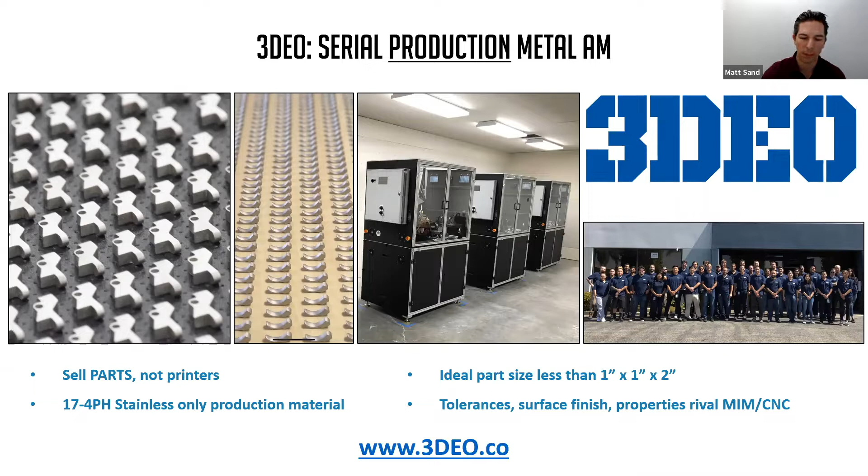I'm the co-founder and president of 3DEO. For over 3 years, I've worked with customers in hands-on applications and moving parts into production using metal 3D printing as the technology. I'm a serial entrepreneur, so I've started a lot of different companies in different industries, and I was also an officer in the US Air Force. I have an MBA from UCLA, so don't hold the MBA against me, but you'll see that my focus is more on economics of additive manufacturing and how that can succeed in the marketplace.

So for today's agenda, I've got 5 key points that I want to talk to you about. The first, for those who are new to 3D printing, we'll quickly cover what is 3D printing. I'll talk about design freedom and what 3D printing or additive manufacturing brings to the table in terms of design freedom. We'll talk about manufacturing flexibility on the factory floor. As you're making parts, what type of flexibility do you gain from using 3D printing as your core fabrication technology?

And then we'll dive into the case study, which is Ergo Kiwi, an ergonomic X-Acto knife for architects and others needing cutting capability. So we'll talk about that specifically in the context of design freedom and manufacturing flexibility. And we'll finish the presentation with how to get started with 3D printing. So with that, let's dive in.

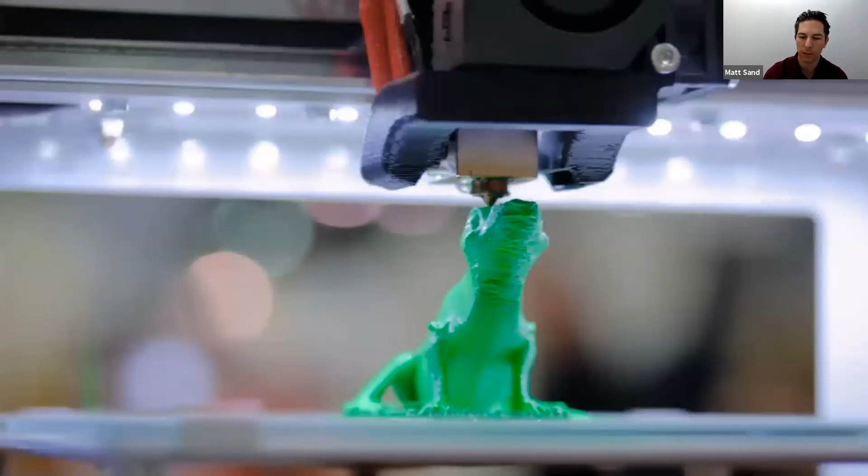First, what is 3D printing? Well, 3D printing is the process of quote unquote growing a part layer by layer. You build the part on top of itself in layers, and eventually, as you can see in the image here, the full part is fabricated. So it's because you're adding material on top of other material that they call it an additive process, as compared to subtractive, which is cutting material away from a block of metal, for example.

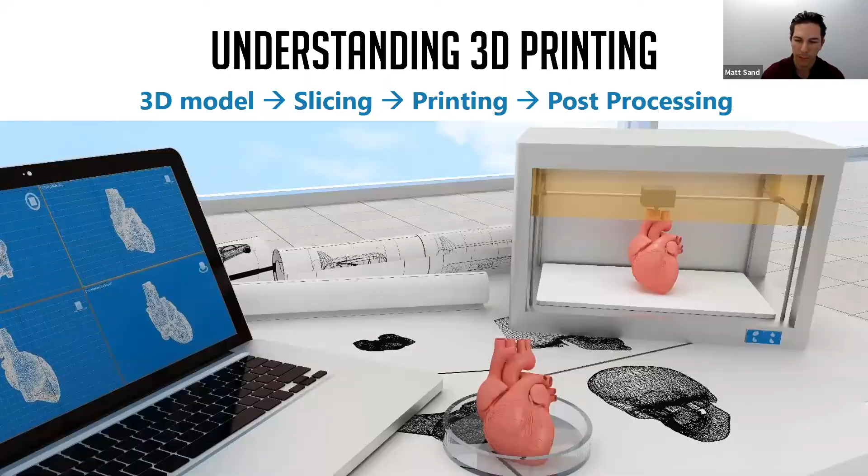So I have this video here that I want to show you of a plastic FDM printer, which a lot of you have probably seen and are familiar with, in action.

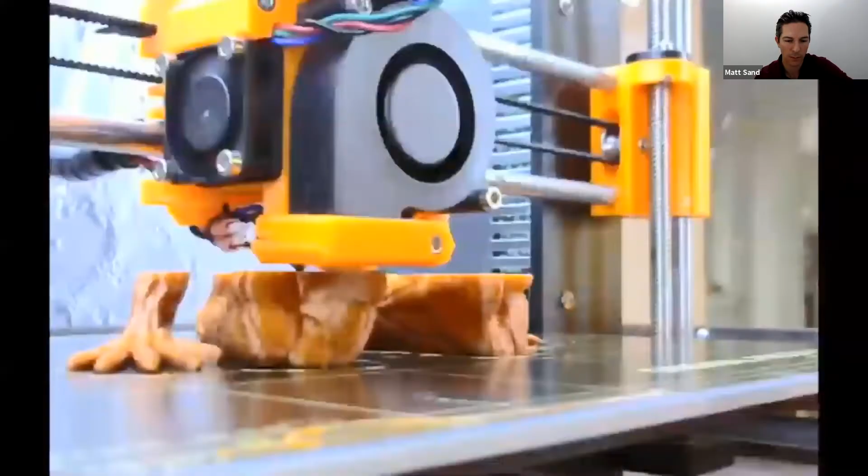As you can tell, the video is dramatically accelerated when you compare it to the actual speed here. But I accelerate it just so that I can show you what it actually looks like. There's material feeding into the printer, and layer by layer, this part is being grown until it's ultimately done, and the character here is fully printed. So that's an example of 3D printing.

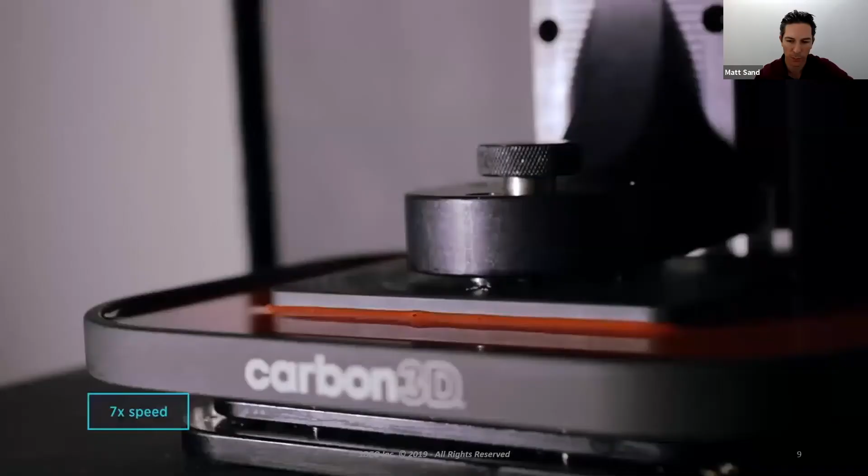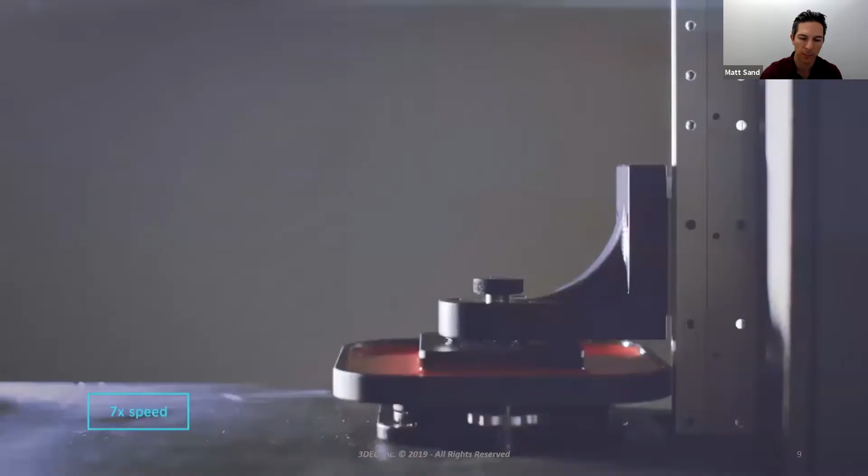Of course, this is plastic 3D printing, not metal. 3DEO does metal 3D printing, but the general principles are the same. Carbon 3D has gotten a lot of attention, specifically because of the speed of its printing. If the other video was sped up by 200x, this video is only 7x faster, and it gives you an example of how fast 3D printing is getting and the type of complexity we can achieve from 3D printing. You're able to gain that complexity because you're growing the part layer by layer.

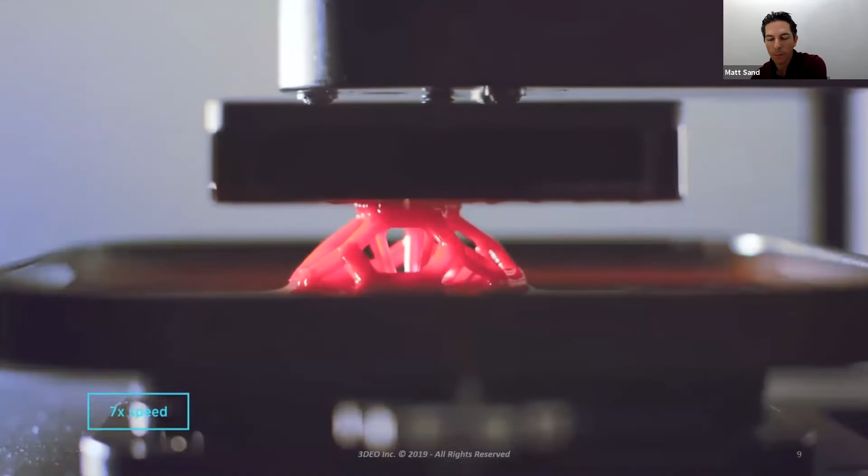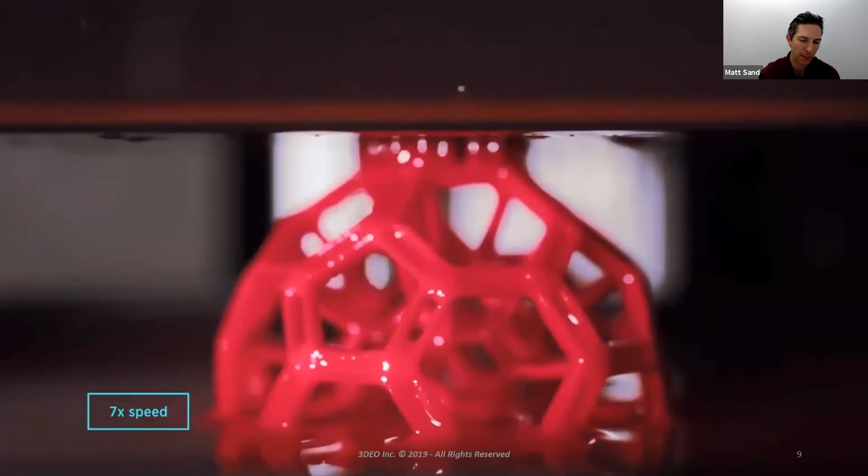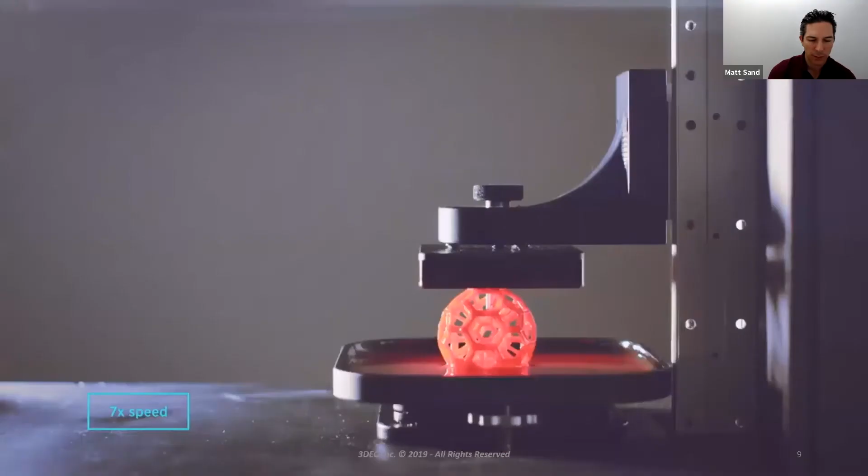This is a pretty famous part because it was printed during a tech talk by the former CEO of Carbon 3D. It was printed during the talk in the background, so it's pretty cool. You can see the complexity of that part as it comes out of the vat. So that's another technology on the plastic side, but let's turn our attention now to metal.

What you're seeing before you is the GE fuel nozzle, which is the poster child for metal additive manufacturing. It's not the entire piece that you see, but just the tip of this component. It was previously 20 parts, it's now 1 part. It's 25% lighter, in addition to being 5 times stronger. And the new design is realized because of additive manufacturing.

Most importantly, when it comes to aircraft design, 15% more fuel efficient, 10% more thrust. So you get all these benefits from working with additive, and as a result, this is one of the biggest success stories in metal 3D printing. Another success story is completely custom titanium hips and knees. These are implants that go into the body. They can be titanium, they can be cobalt chrome, but this is a great application and a huge success story in the world of metal 3D printing.

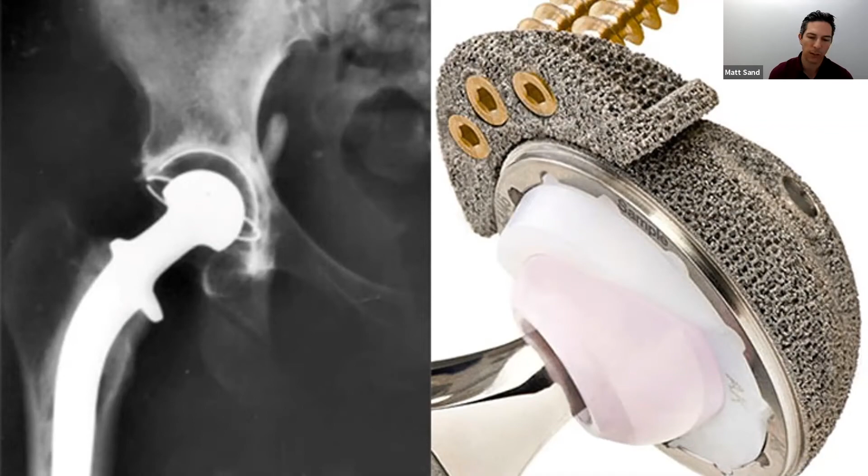When we focus on metal additive manufacturing processes, I just want to throw out there that 3D printing of metals is a very broad category. There are many different processes that fall into this category. Powder bed fusion; DMLS, direct metal laser sintering, is one type of powder bed fusion. Binder jetting is in the media a lot recently; there are some new binder jet processes coming on the market. Extrusion is finally here for metals, so that's the FFF or FDM type of deposition.

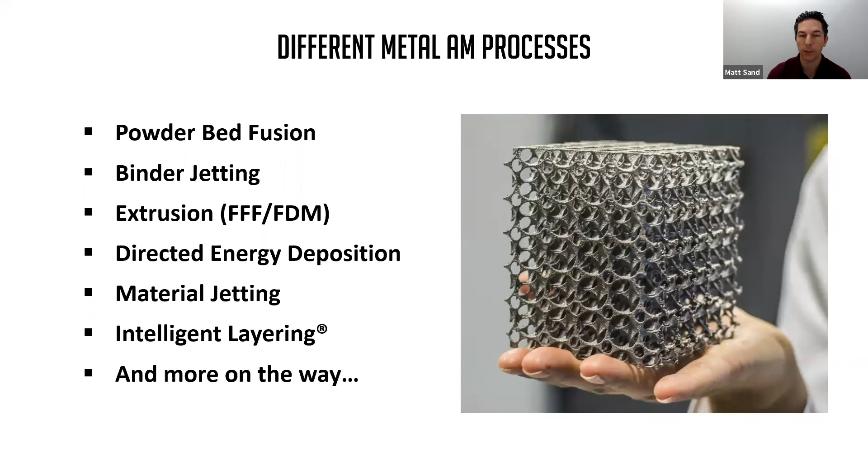DED, material jetting, and then intelligent layering is 3DEO's unique and proprietary technology. And there are also more on the way. So these all fall under the category of metal 3D printing. Understandably, if you're new to it, it can get pretty confusing. But it's worth working through the difficulty to understand what the technology can do.

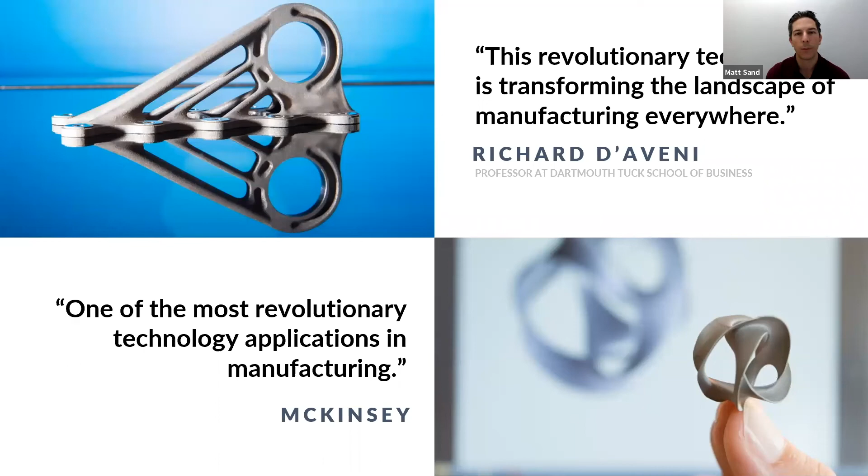And here's why. A professor at Dartmouth said this revolutionary technology is transforming the landscape of manufacturing everywhere. So pretty exciting. McKinsey, the management consulting firm, says that it's one of the most revolutionary technology applications in manufacturing. So without a doubt, 3D printing has already changed the world of prototyping. It's now starting to change the world of production dramatically, and now's the time to dive in.

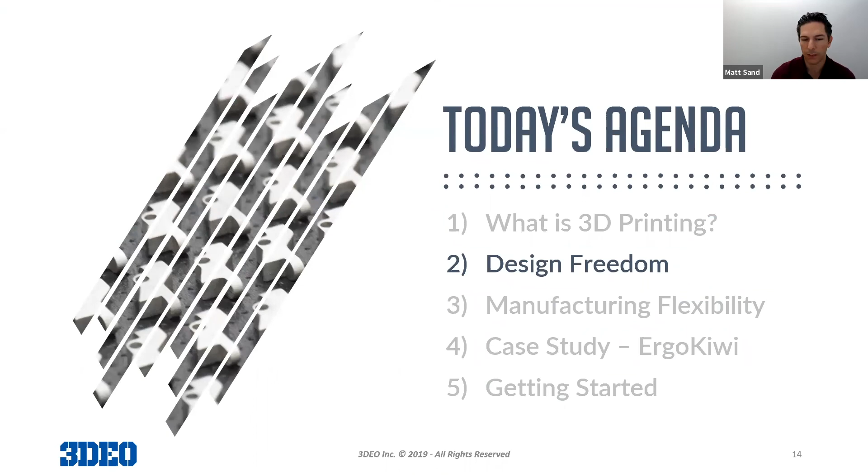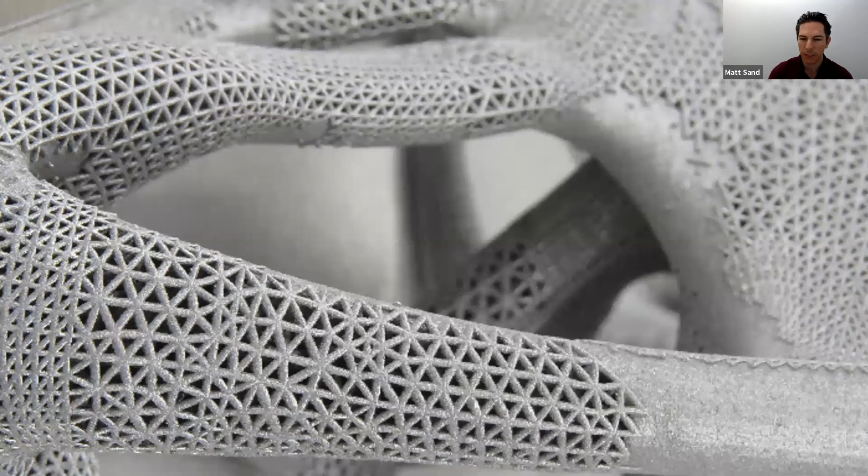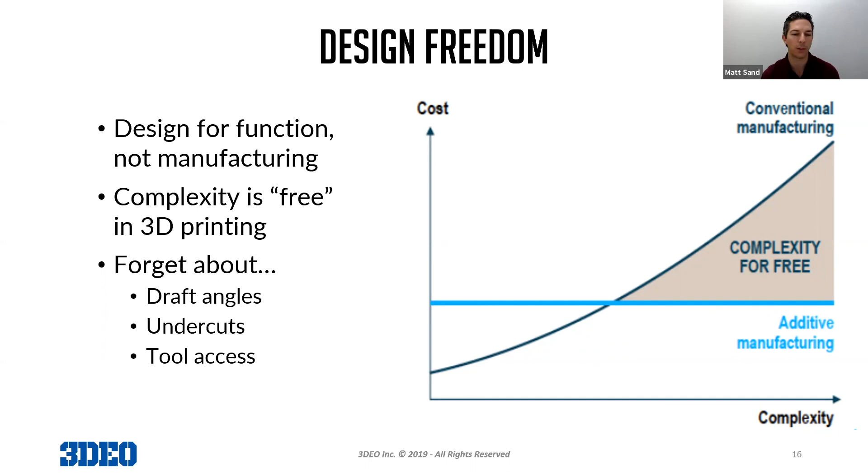Here's a part of a bone structure that's being mirrored and mimicked by 3D printing, and it can only be made this way. So when we talk about design freedom with 3D printing, we're talking about moving towards a world where we can design for function. You can design for the actual function without making compromises for manufacturability.